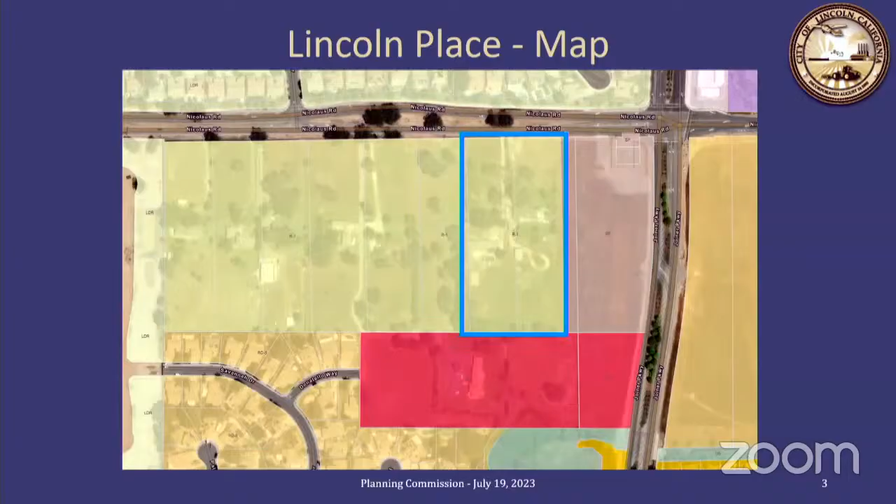The project is proposing 3.994 dwelling units per acre, similar to Fullerton Ranch, which is approximately 1,000 feet to the west on Nicolaus Road.

This is the actual Lincoln Place subdivision map, and here is an aerial picture showing the project site highlighted in blue. The subdivision lots will range in size from 7,000 square feet to 8,645 square feet, with an average lot size of 8,084 square feet.

Primary access will be from Nicolaus Road via a right-in, right-out residential street with a cul-de-sac and street stub out for future connectivity to adjacent development. The roadway and cul-de-sac are designed to accommodate both solid waste vehicles and fire truck apparatus turning movement. Full improvements are proposed along Nicolaus Road, including curb, gutter, and sidewalk, along with a 6-foot tall masonry sound wall.

Findings: the project is consistent with applicable standards of the general plan, including policies related to subdivision design outlined in this PowerPoint slide. The project was reviewed and complies with the Lincoln Municipal Code Title 17 subdivisions and Title 18 zoning for lot size, width, depth, and roadway design.

The project meets CEQA requirements, as the previously certified initial study mitigated negative declaration for Nicolaus Place adequately addresses potential impacts of developing the 5.32 acre site for residential use. The increase of 2 lots in the current proposed project does not constitute a substantial change requiring major revision to the previous negative declaration. Therefore, the previously adopted mitigated negative declaration and mitigation monitoring reporting program for Nicolaus Place continues to apply to this project site.

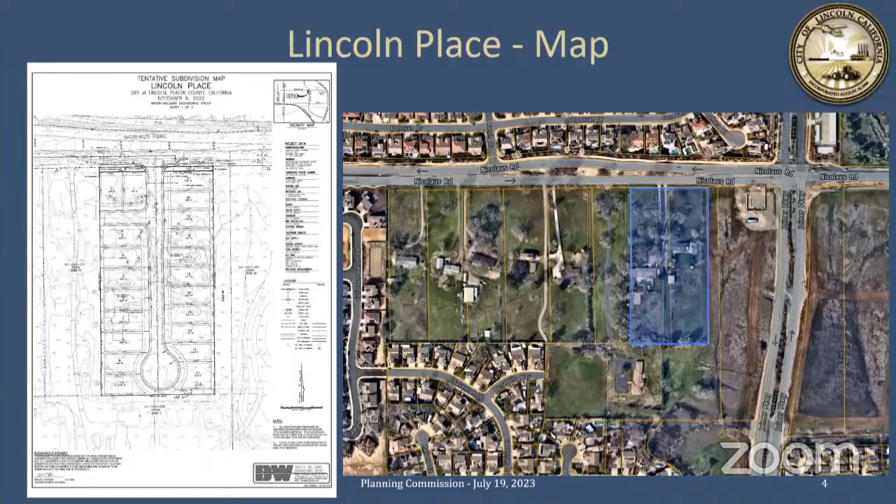One second, I'll jump in for just a discussion point. We were having this actual conversation just prior to the meeting tonight. And it is interesting when you look at the site in the context of the city. It's kind of a last remaining island, if you will, where you have these ranchettes surrounded by existing development. Some of the development leapfrogged beyond it down Nicolaus.

So what you're left with is some individual parcels, and they're small. This isn't our typical tentative map where we're thinking 20 acres, even 30 acres - this is five acres, I believe. So you're trying to coordinate between different property owners as well.

So I was actually kind of surprised and heartened that there are some connections. I think Efren's pointing that out, that were thought of ahead of time to mitigate or minimize the curb cuts onto Nicolaus. But in terms of grand coordinating and timing among these smaller lots that are kind of piecemealing into the greater context of the city - challenging, kind of is what it is there.

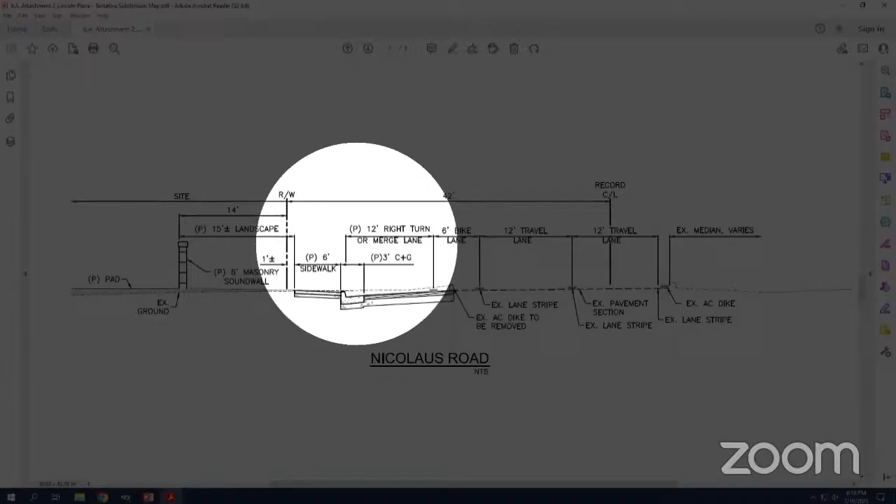You have basically just a shotgun lot right there with 20 units on this one? Yeah, 21. So in terms of opportunity to do that, more challenging, difficult, but that connection you see there that Efren was highlighting, to make that internal connection to the Lincoln 14, I think speaks to maybe some of the things they could do to address those concerns. Yeah, and that also addresses the issue of that long cul-de-sac as a safety problem. That's at least some mitigation of that.

What tools do you have in your toolbox to bring adjacent landowners together to do some joint planning? This isn't a specific plan, I know. It's difficult because when John Doe sells, who knows when Jane Doe sells - you can't force someone to sell or coordinate. These are individual actors. And I think the best we can do is this irrevocable dedication for that little connection internally, to kind of see those things in the grand scheme in terms of your access on Nicolaus, looking at general traffic coordination.

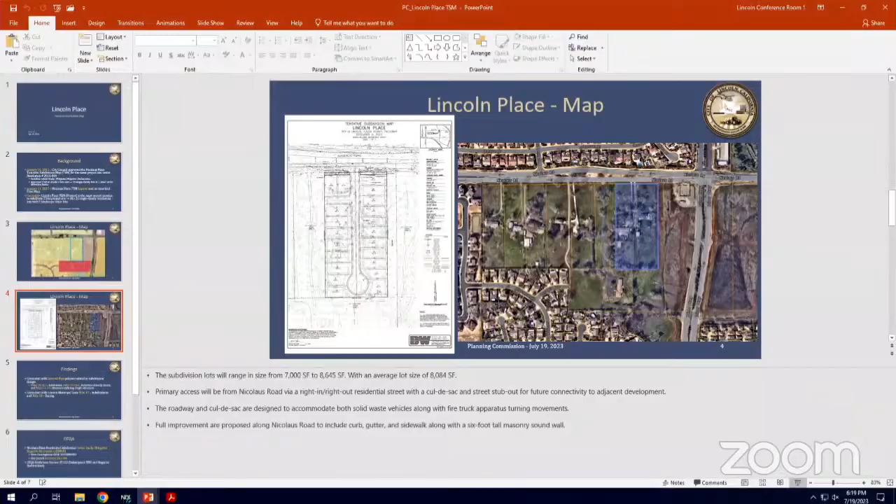I think they did a pretty good job on that, actually. There's another street down there we were looking at, Efren—Donatello, I believe—that you can see is kind of stubbed out there on the bottom. We have the Google Earth view right there. That's just sitting there waiting for these folks to basically sell their lots at some point, so there was some foresight where that road will continue through and provide that internal connection.

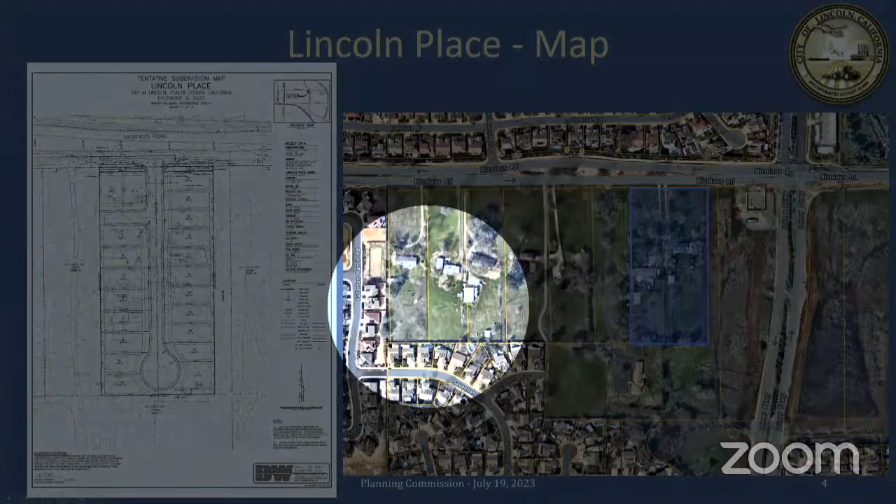Beyond that, if you have any other concrete ideas, we'd welcome hearing them. It would be nice to have some kind of trail or bicycle trail, or a walk or pedestrian path that would connect somehow back to Joiner, where you have employment centers and retail—maybe even down to the bottom of the cul-de-sac.

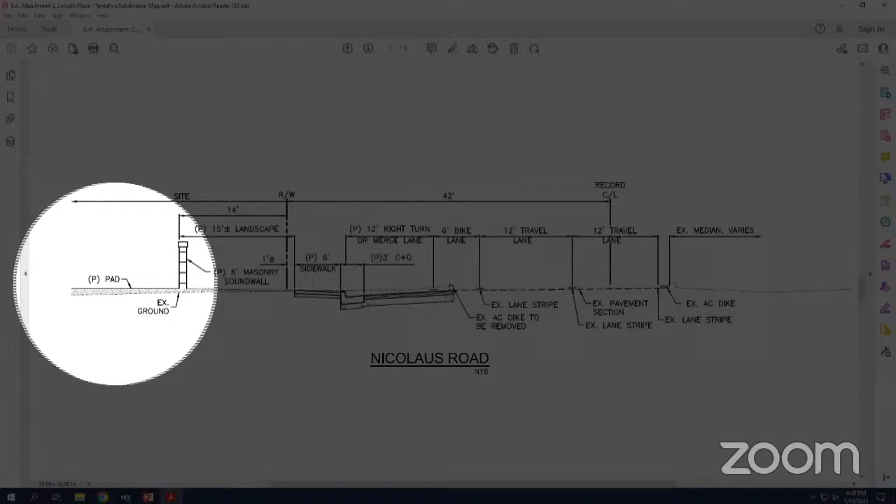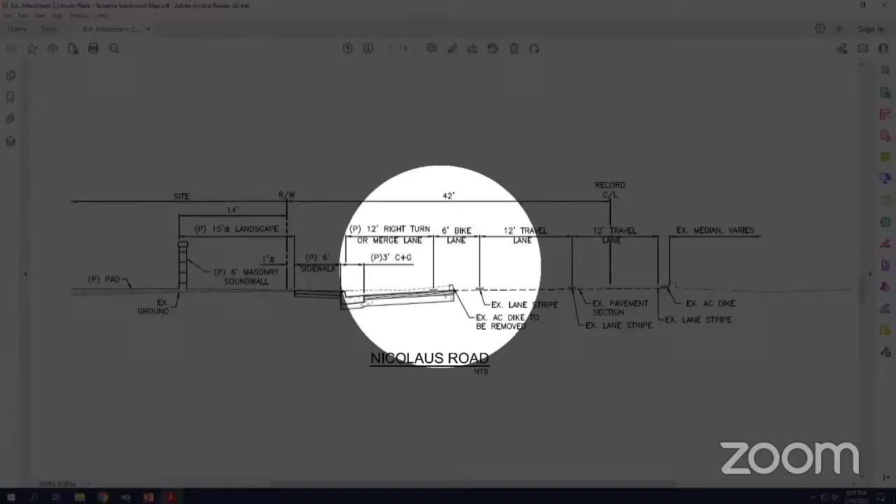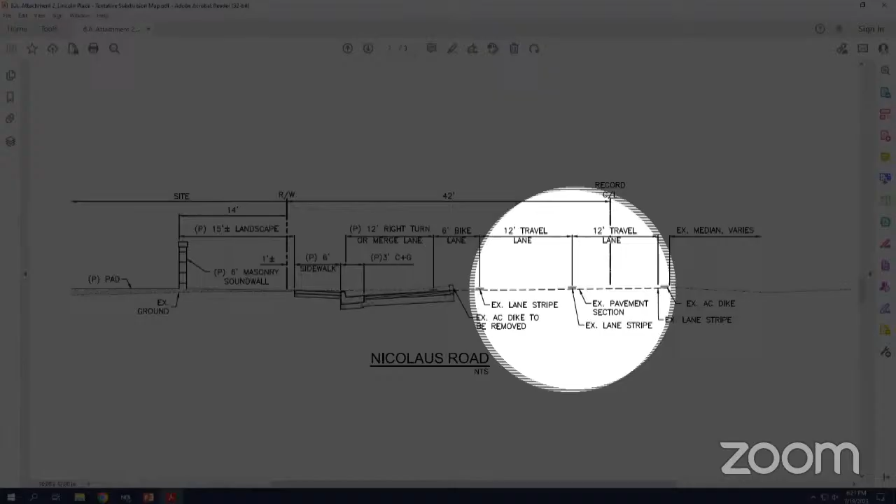If I may, I just wanted to answer your earlier question about Nicolaus Road. Here's the building pads for the subdivision. You have that sound wall right here, then the 15-foot landscaping lot, then the sidewalk, curb cut, and the actual Nicolaus Road. That's the merging lane that goes into the development, since there's a section that will go right in, right out to that new proposed street. Then you have a 6-foot wide bike lane, and then the two individual lanes on Nicolaus Road, the divider, and the other side of Nicolaus Road going westbound.

What I meant to ask, and I probably wasn't clear, was within the subdivision, is the sidewalk contiguous to the curb, or do you have a parkway where you have trees and landscaping between the curb and the sidewalk?

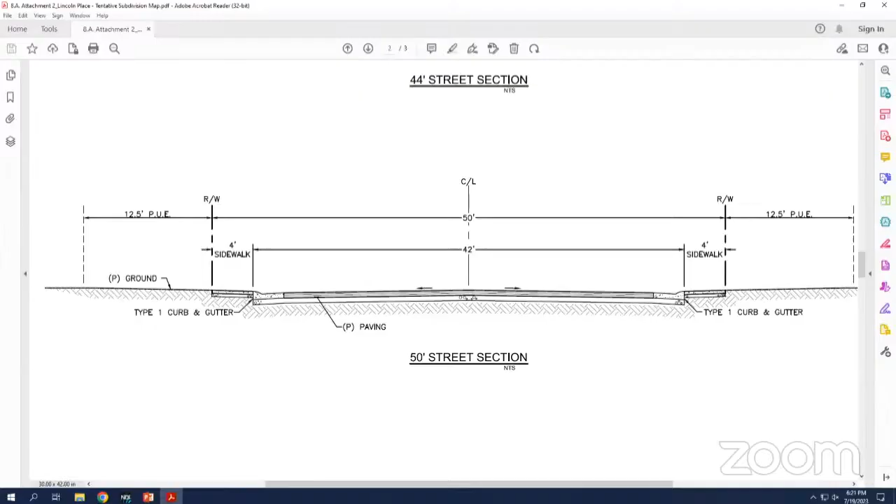There are two different designs here for the subdivision. You have the PUE, a 4-foot sidewalk, curb, gutter, and then the street going both directions. Then the same design for the other street. If you look at it, this is the 50-foot right-of-way of the subdivision, with that street leading in here, and this is the 44-foot wide future street stub out that will connect to the adjacent properties.

We also have the applicant here who can answer some of these specific design questions as well. Let me put it another way—I'm still not understanding. Within the subdivision, is the curb adjacent to the sidewalk, or is there a parkway where they have trees planted and landscaping?

Okay, so the answer is no. Well, the reason I bring this point up is because of land use policy 14.4.

Sorry, pedestrian friendly streets. Jerry, people online will not be able to hear you—if you can please move the mic forward. Thank you, I'm sorry, thanks. Steve.

In the general plan, there is land use policy 14.4, pedestrian-friendly streets, which reads: 'The city shall design local streets to not only accommodate traffic, but also to serve as comfortable pedestrian environments. Street tree planting between the street and the sidewalk to provide a buffer between the pedestrian and the automobile. Sidewalks on both sides of streets with the sidewalk separate from the curb face with landscape strip where feasible.' I'm not omitting the 'where feasible,' but I think that is an important general plan policy.

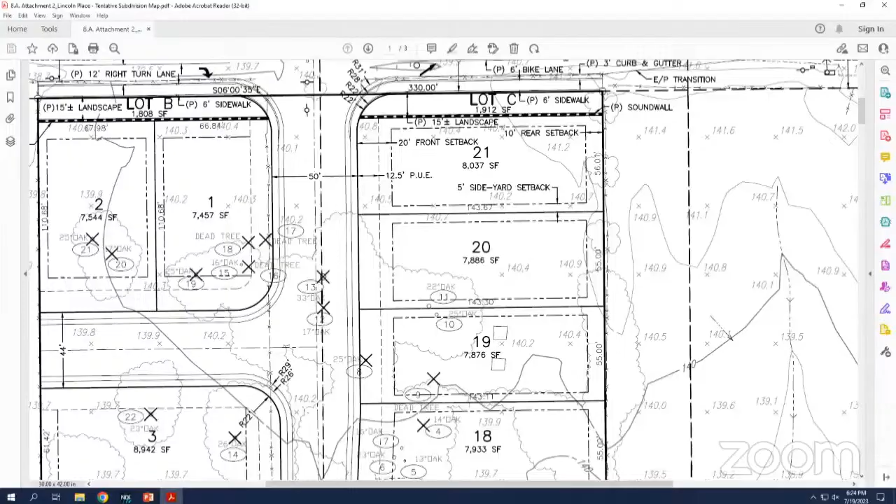Yes, and it is being addressed by the subdivision. That policy is being addressed by the landscaping lots—lot B, lot C—and also in the public utility easement. When this project comes forward at the improvement plan stage, planning does review the typical front yard landscaping for subdivisions such as this, and we have the requirement for street trees in that area on the actual lots. But again, the applicant is here and can answer more specific questions far better than I can.

Do you have anything further, Jerry? No, not at this time. Was there anybody else with a question of staff? I think I have some questions after the public hearing, but for now, are there any other questions of staff? We're open to the public hearing, at which time we can hear from the developer.

We'll open the public hearing. Is there anyone from the public who would like to speak to this item? Chairman Gilbert, I do not see any hands raised online, and I did not receive any cards. I don't see anyone in the room. Our public hearing is open. If there's anybody in the room who would like to speak during the public hearing, now is your opportunity.

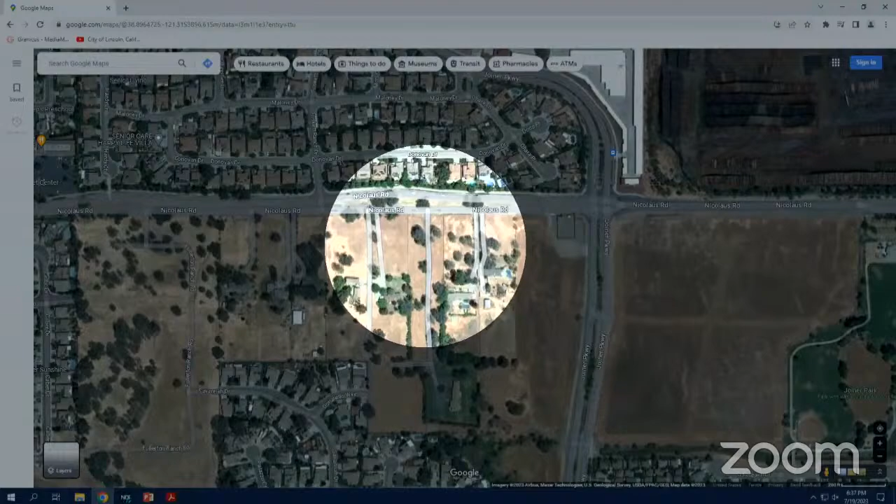Commissioner Johnson, you're envisioning a trail at the bottom of Lincoln Place cutting east onto Joiner? Well, it might be that, or it might be no more than access to another street—just somehow that people can walk or ride their bicycle out of that subdivision, without going all the way up to Nicolaus.

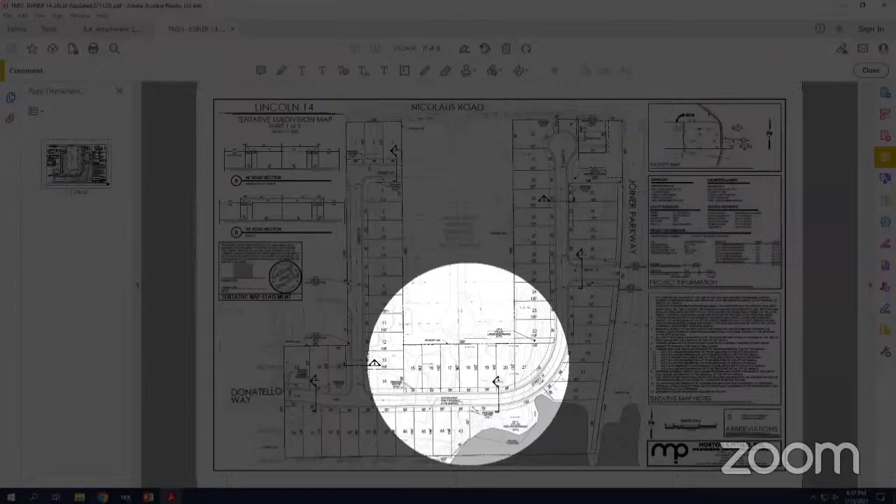That just runs into designing and maybe potentially eliminating a lot. I don't think so—I mean, it doesn't appear there's a lot of room there. At this moment, I'd like to invite the developer. He could probably answer a lot of these questions.

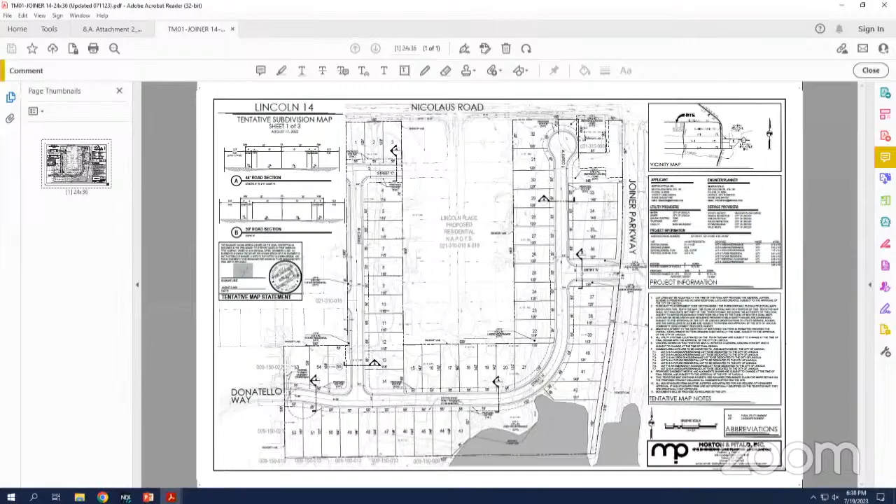Mike Robertson, Morton & Pitalo. I'm the engineer on the project. I'm not the developer, but I'm representing the ownership. Thank you, Efren, for a good job.

So this whole project's been around a long time. They said it was expired and the owners decided to keep it going. So we did a resubmission of the map. It ended up being a full submittal since it did expire.

But this whole area, all the way from Joiner, all the 7 lots you see in front of it, it has been master planned multiple times. My firm has got 24 layouts on this whole area. I know other engineers working with it have the same thing. We've compared notes and can't believe how many times a subdivision gets designed in this area. But we have 7 property owners, 7 engineers, probably 7 attorneys, and it's gonna be hard to get along.

At the same time, I think we have a plan. This is the first subdivision, you'll probably see more coming after this. This will be the first one in this area. Originally it was a single cul-de-sac with only one access in. And the city was very uncomfortable with this whole area having multiple accesses onto Nicolaus Road.

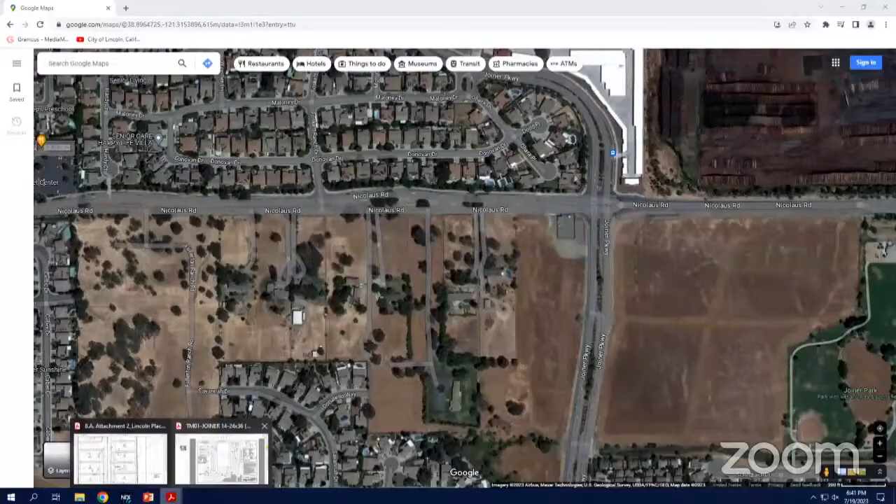Although this is a new one. Yes. But my question was at the base of the cul-de-sac. Can you pull up the cul-de-sac? We're down to the bottom.

There's a Lot A. Lot A is intended for a storm drain pipe. A storm drain pipe will be coordinated with the adjacent property owners and we'll have connectivity. You can see the dash line there that continues on and drains down to the creek. It wasn't required, but there is an opportunity, and that storm drain will continue and the next subdivision will pick it up. There's a corridor there that could act as a connection, but you'd need their cooperation. So I would hate to put one in now - it doesn't go anywhere, that doesn't make any sense. But that lot is intended to be owned by the city. So down the road, you could have that possibility.

All right, how does Lot A connect? Okay, so it's a pretty broad connection there, isn't it? Yeah. We have a storm drain line going through there. So that's a good point.

Great to have trails built on top of it. Yeah, it's an underground pipe, so there's that opportunity, but I wouldn't want to put that in with this subdivision because it would be a path to nowhere. But it would be a city-owned lot, and eventually you'd have that opportunity down the road. So that's a good idea.

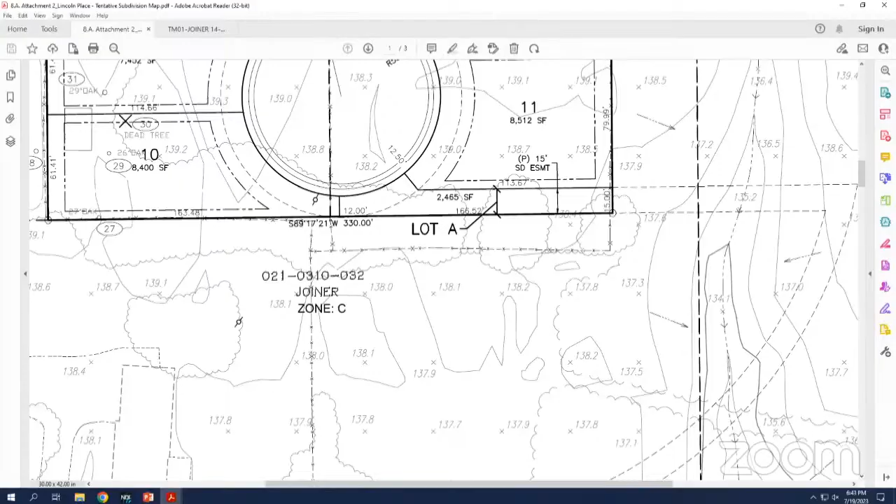Do you have the option within the right of way to separate the curb from the sidewalk and still have buildable lots? Not within the right of way, it would have to be a different layout, but that's a possibility. You have to work with the city staff on that.

Well, that is the general plan standard. I don't know about the building standard. Okay, thank you.

I do not. Okay. Question from the public that we may have missed? I don't see any hands raised online. Okay, the chair then.

Good. I'm sorry, you're waving at me. I don't know what you want. Are you asking public to speak right now? Public hearing is closed. Would you like him the opportunity? It's closed. Yeah. Okay.

We don't have any open questions at the moment. Okay, we're going to bring it back. Chair will look for a motion. I'll move to approve. Second. We have a motion and a second. We do this by roll call? Please.

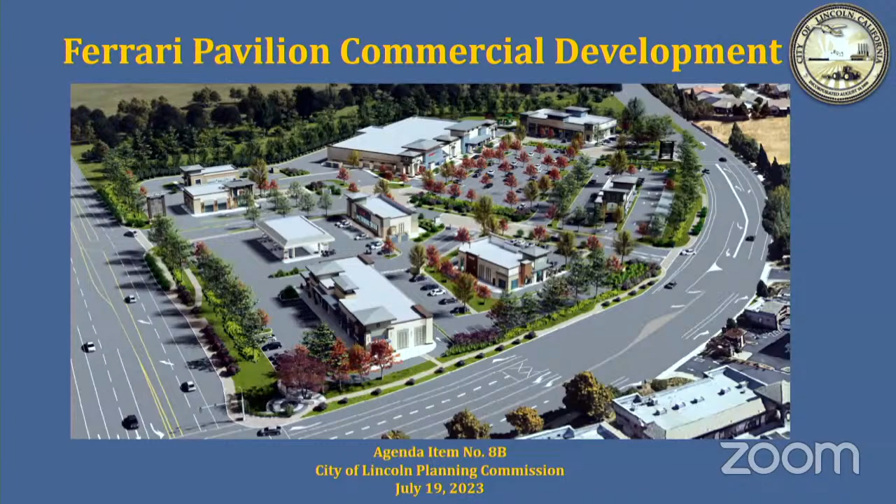Just a quick overview of the project. The proposed Ferrari Pavilion is approximately 69,578 square feet of commercial center within 8 buildings. The vacant 12-acre property is within the Sun City Lincoln Hills General Development Plan, which is part of the 12 Bridges Specific Plan. The requested entitlements consist of the following: a specific development plan or design review for the proposed buildings, a conditional use permit for specific uses, including a drive-through as well as alcohol sales, and a findings of consistency with the general plan involving the vacation of a landscape easement along Ferrari Ranch Road and Lincoln Boulevard.

The applicant for this and property owner for this project are Frayji Design Group and Arm Properties LLC, who both of them are in the audience today.

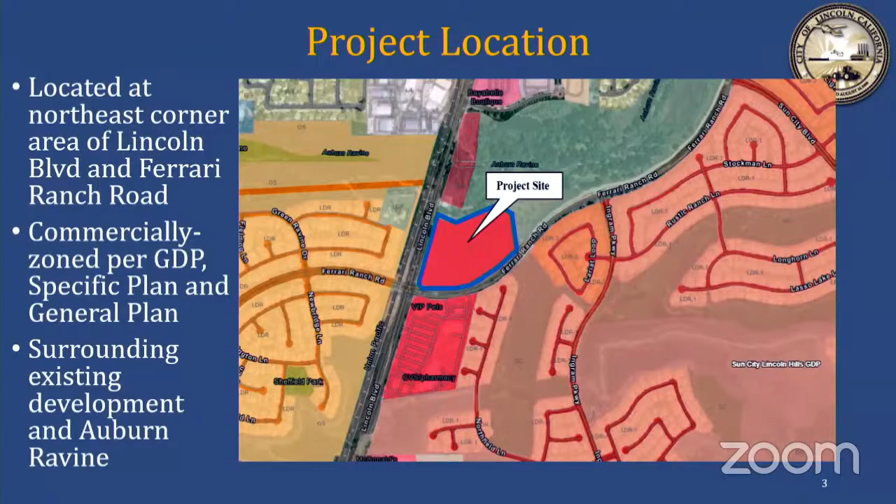This is a site plan or a location map of the proposed project. If you can see that, okay, good. Shown in the circle here, highlighting in blue outline and in red color is the proposed 12-acre property, northeast corner of Lincoln Boulevard and Ferrari Ranch Road. It is commercially zoned per the GDP, the specific plan, and the general plan. It is surrounded by existing uses on the west side, which is Lincoln Crossing, Lincoln Hills Center, which is Safeway, CVS, pharmacy, and other commercial uses. Auburn Ravine Creek borders the property to the north, and to the southeast as well is a portion of the Sun City.

Aerial photo again of the property in blue. It is a vacant site. It was previously graded as per the previous approvals of the project, and those previous approvals, as discussed in the staff report, have expired. So what we have here is basically the new project, the new version of Ferrari Pavilion. There are improvements existing, in particular along Ferrari Ranch Road, which includes a sidewalk, gutter, and curb and gutter.

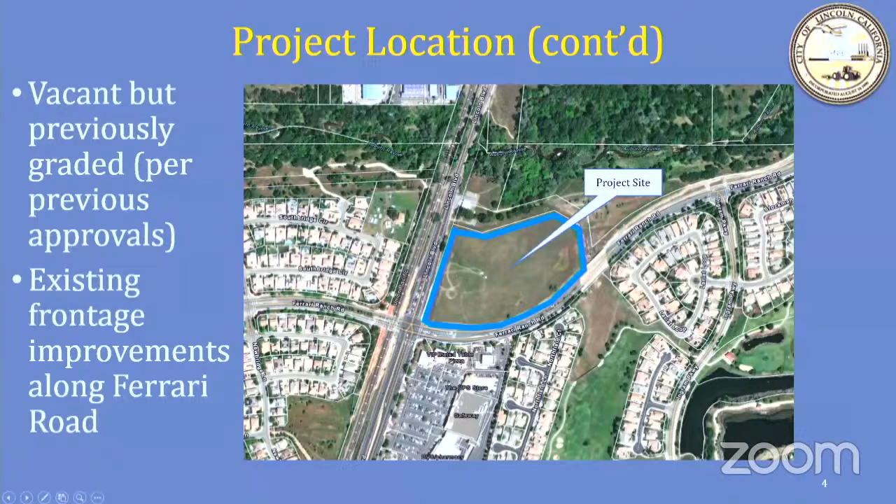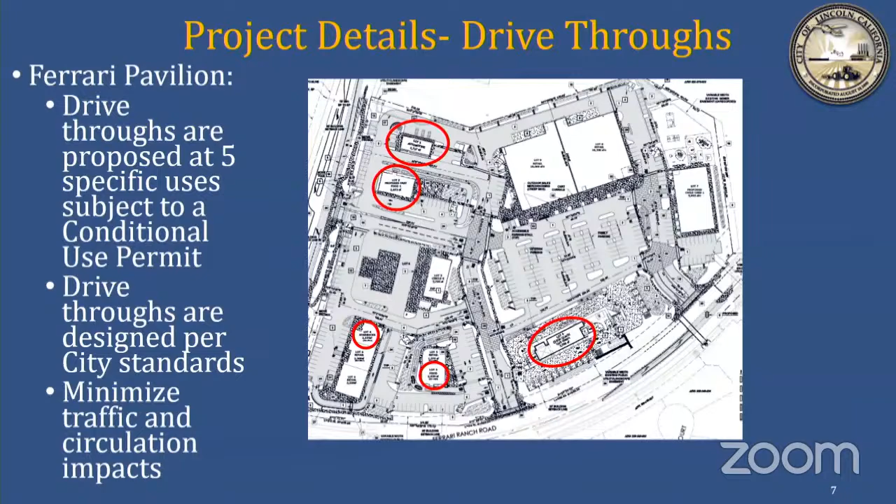Also subject to a conditional use permit, there are two uses proposing alcohol sales: this is a grocery outlet, again for consumption and/or sales of alcohol, and of course the gas station. There are also restaurant uses on site, and if a restaurant proposes to sell alcohol, it's permitted per the ordinance. So all the restaurants proposed here, including this one in particular, do have alcohol sales, but it's a permitted, bona fide use per the code. So all the non-restaurant, non-bona-fide uses are the ones subject to a conditional use permit.

Some plans, also shown in your staff report, cover improvements and amenities on site. This is the landscape plan, and this is the grading plan for the project. There are improvements including parking, landscaping, signage, as well as lighting. There are also improvements proposed along the road, including curb and gutter, sidewalk, and bicycle lane along Ferrari Ranch Road, as well as installation of a traffic signal at the intersection with the access off of Ferrari Ranch Road. This will connect to existing public sewer, water, and drainage adjacent to the property.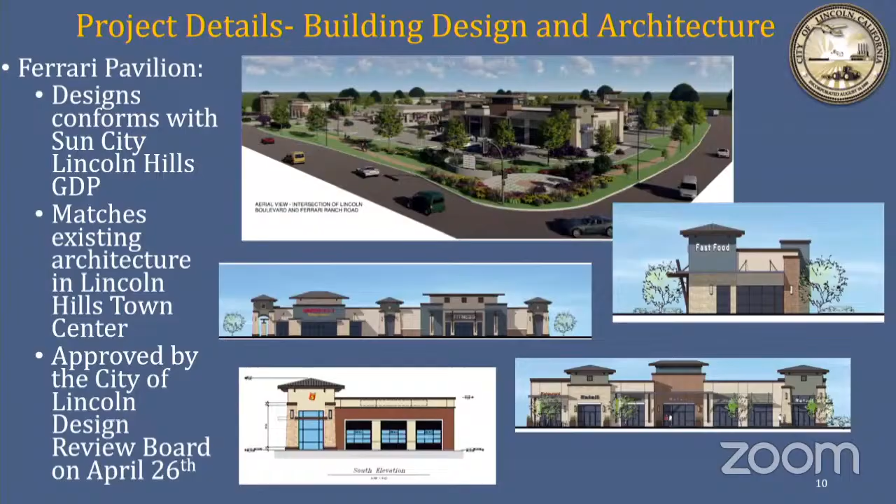As discussed in the staff report, staff has determined the project is consistent with the general plan, the Twelve Bridges specific plan, the Sun City Lincoln Hills General Development Plan, and zoning code Title 18. The DRB recommended approval of the project to your commission for consideration tonight. The project is deemed exempt from further environmental analysis, given that it complies with the environmental impact report for the adopted Twelve Bridges specific plan, subject to the mitigation measures for that EIR. There are conditions of approval attached in the resolutions presented to your commission, and if approved, these conditions would ensure the project is orderly and timely developed.

As detailed in the staff report, staff recommends the following to the Planning Commission: that the project be found to be exempt from further environmental analysis, given that it's consistent with the Twelve Bridges Specific Plan EIR, and approval of the Ferrari Pavilion commercial development based on resolution approving the specific development plan and design review, resolution approving the conditional use permit for the drive-throughs, resolution approving the conditional use permit for the alcohol sales or consumption, and resolution for determining findings of consistency with the general plan for the proposed vacation of the landscape easement for the project.

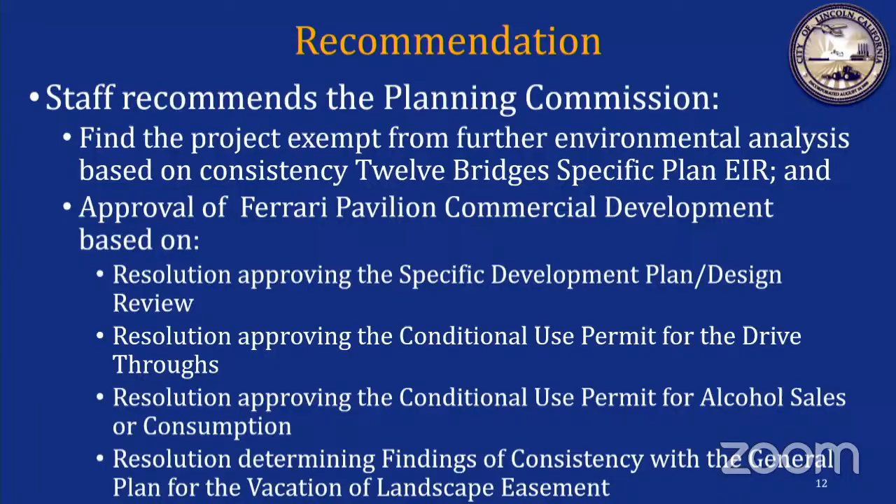Be more than happy to answer your questions if you have any for staff, and the applicant as well can provide some context and answer your questions that you may have. Thank you.

Questions at this time? No. I have a few.

Your staff report, among other things, says that this plan is consistent with the city's general plan. I wonder, land use policy number 13 within the general plan says to preserve Lincoln's character and scale, including its traditional urban design and historic character. That's what our goal is.

Among other things, it calls for the city to identify key entry points on the edges of the downtown and support programs and projects that enhance downtown gateways and transitional zones between downtown and surrounding neighborhoods to make downtown more inviting for residents and visitors.

You think this qualifies as a downtown gateway? It's outside of it. Gateway could be. Well, does it fall under this section of the general plan?

Well, there's also an accompanying Twelve Bridges specific plan that it adheres to those policies in the general plan. I think from staff's point of view, we have to make sure that it conforms with the next level up, which of course.

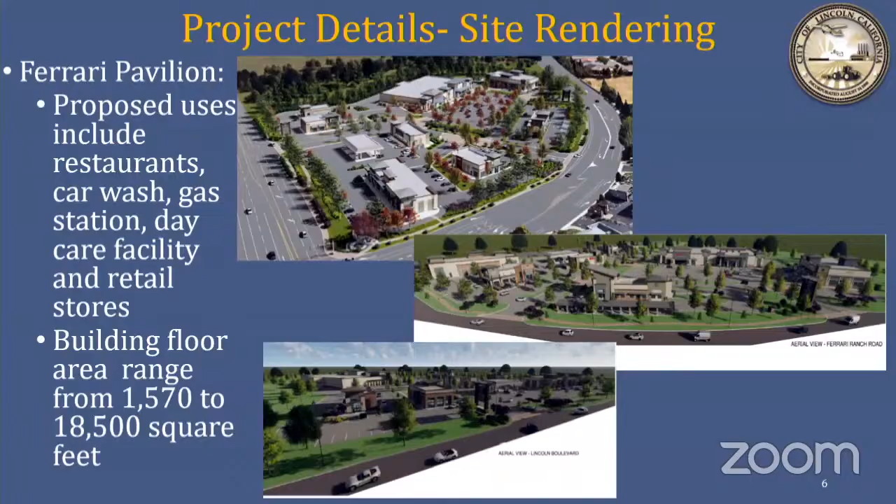It looks like there is some screening on lot 4. Is there any for the drive on lot 4, the Starbucks? Is there any concrete or hard screening on lots 2, 5, or the car wash for the street? I don't know off the top of my head, we can ask the engineer that. There will be landscape screening, but anything hard screening, I don't believe there is, but we can confirm that with Tony. Okay, so the only hard screening may just be on lot 4, the Starbucks.

I believe the Starbucks is right in this area, not sure if you see it. But again, there's landscaping. Is a concern regarding visibility of the building? I just want to clarify where screening is and isn't. Other than the landscape screening along the sidewalk, I don't believe there's anything else, but we can confirm that with Tony.

Okay, and my last question is about traffic. So you have one entrance off of Lincoln Boulevard, right where it goes from 2 lanes to 1 lane, and that's basically the only way to get downtown. I mean, you can come out the other ones, but what analysis have we done on the traffic patterns that having 5 drive-through elements in this density will do to the traffic at this intersection and entering downtown?

So you referenced that some analysis was done earlier on. Was that knowing what was going to go on here, or is that just sort of generally saying this traffic will be fine? The uses, it was identified as far as what could go there and established as part of the GDP. That was discussed. Again, it's a larger development, part of the Twelve Bridges. It was even further narrowed down into sub areas, and that's what the subsequent EIR was certified to address, those anticipated uses for that site.

Of course, to the extent that it was applicable, whatever CIP projects were also referenced into the study. But as far as other analysis, of course, you have physical impacts, ground impacts, those were analyzed. And again, it's in the context of the EIR.

So it sounds to me like when any traffic analysis may have been done, it was before we knew we were going to have 4 or 5 drive-throughs and the gas station. Well, again, the drive-throughs are CUP driven, there's designs that are applied, but if you're talking about just vehicular traffic, that would have been part of the analysis that was conducted and then incorporated into the certified EIR. So again, as long as the uses standards are met by this project and all those applicable policies, we found them to be consistent with the CEQA determination.

So we've seen this project before in a different, very similar layout, right? And the retail use next to Grocery Outlet bargain market, I think, was a Goodwill retail store. Is that still the plan, to have that use there? Because at the time, we had a lot of discussion about that particular usage and how loading was going to go. I think there were some conditions placed on that. Is that still the plan? I'll defer to the applicant with regards to the anticipated tenant for that.

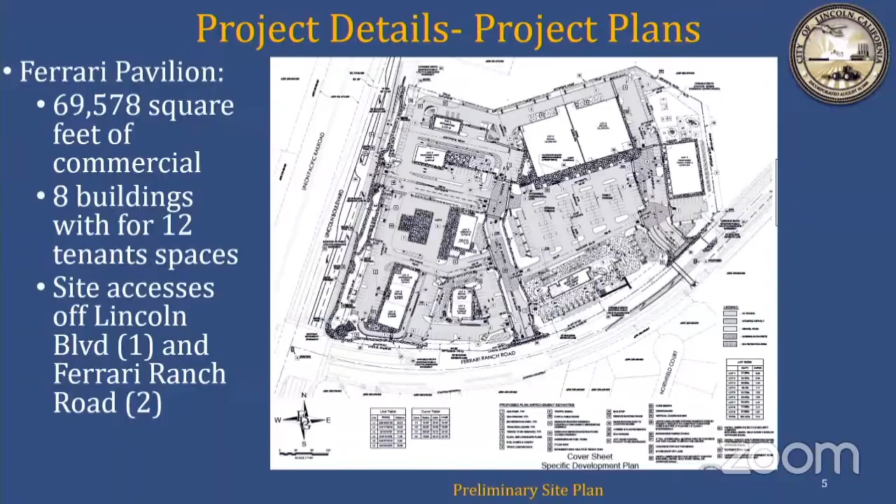I also want to comment on John's comment about bringing up the trail to nowhere. I think it's an oversight not to have that either in this or next to it, and I'm hoping that if this project is approved, the city will someday put the trail through there as envisioned by the city's bike master plan and trail plan.

That's all I've got. Oh, well, let me just say this—I have an opportunity to do it before we go to a vote. We're not going to vote until the public hearing. Okay, then I will say my comments.

Are there any more questions from the commission? If not, we'll open the public hearing. Is there anybody that would like to speak? Well, ask the developer or the representative to please come forward, and we'd appreciate if you could address the questions of the commissioners, and we'll go from there.

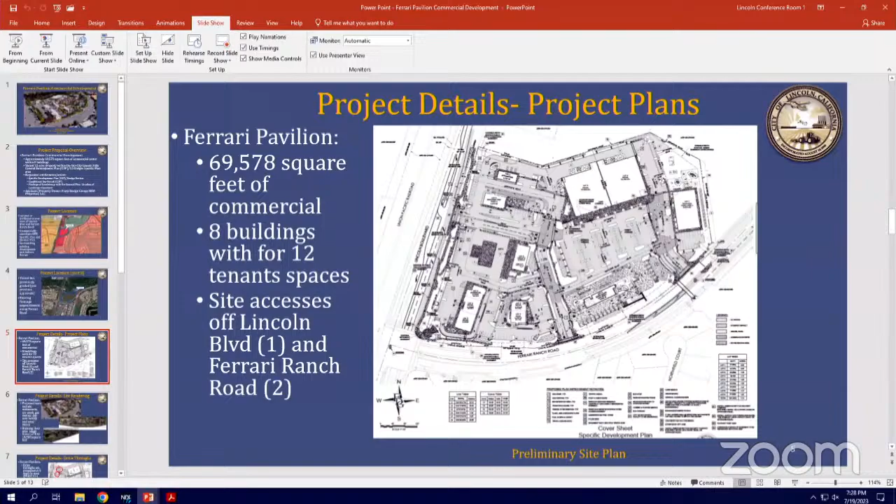We also added many locations throughout the project for bike racks to allow people to utilize the site. If they come from the open space and go through the site, there are bike racks so they're able to enjoy the site and continue going north.

Again on sidewalks, we have a parallel sidewalk on the main road, but throughout the site we're required to have connectivity for ADA, so the sidewalk has to bridge to all the buildings from everywhere you're coming from. On Lincoln Boulevard, because of elevation, we have to do parallel sidewalks - so we have two sidewalks, one has to follow up to meet the ADA requirement.

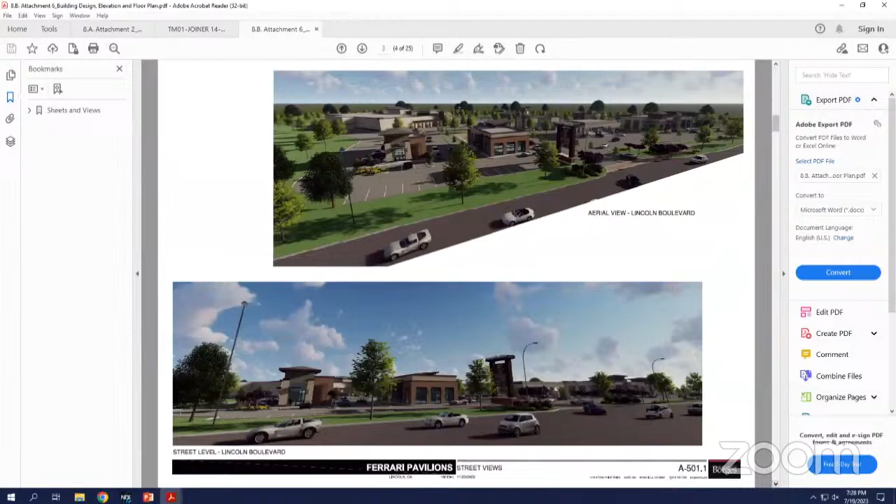Thank you. Is there anyone online that would like to speak during the public hearing? I don't see any hands raised, Chairman Gilbert. Are there any further comments while the public hearing is open?

I will close the public hearing, but I'd like to make a comment about the discussion of a potential tenant tonight, and remind people of some history. This planning commission, some years ago on this proposal, was disenchanted with one of the tenants and was not in favor of doing this project.

And it ended up at the city council when I was a member of the city council. The city council endorsed this with that tenant. It is no longer an issue.

All of the concerns that were addressed by the applicant are in place. So we're not here tonight to redesign the shopping center or decide what tenants are going in. I need to put a personal thing out there. I used to finance shopping centers, very large shopping centers. As the finance arm, or as the planning commission, or as the city council, you don't design shopping centers. You lend money to the lender, you approve the project because it meets your criteria, and you don't step outside your box, because when you do that, you start to cause problems for a lot of people.